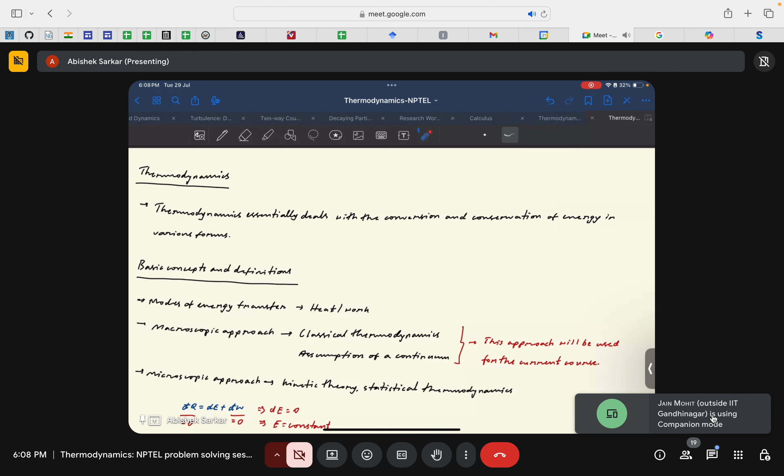Since these energy interactions are something we deal with on a day-to-day basis, from the microscopic level to very large scale interactions, the applicability and relevance of thermodynamics becomes quite immense. This course will help us visualize these kinds of interactions and understand how this energy transfer occurs and why it occurs, in the directionality of these energy interactions, and help us understand how we can quantify it in the best way possible.

If anybody is taking this course for the first time, I'll give a quick note: this course at the very beginning may seem quite uninteresting, because that's what happened to me when I took the course for the first time. But as we see the implications it has in our day-to-day life, we'll appreciate its beauty, and how the scientists who contributed to the development of this course helped us appreciate its beauty and applicability. So with that little bit of motivation, let's start the course.

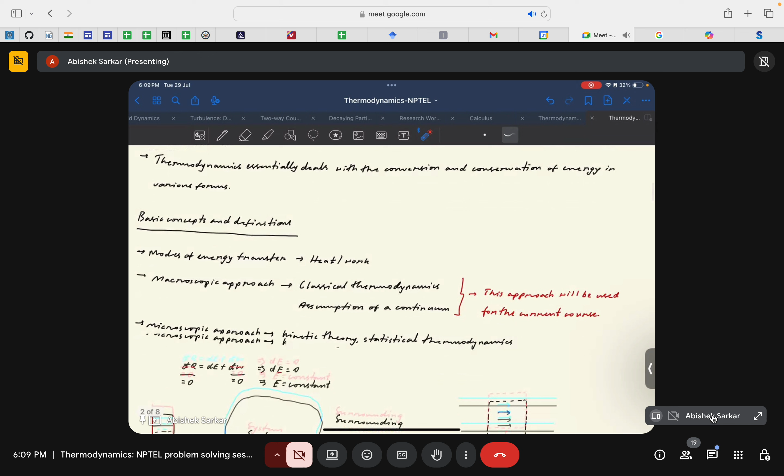As in the lectures, Professor Anand thoroughly covered different concepts and definitions important to start the course. Thermodynamics deals with these modes of energy transfer, and these modes of energy transfer interactions are mainly in the form of heat and work.

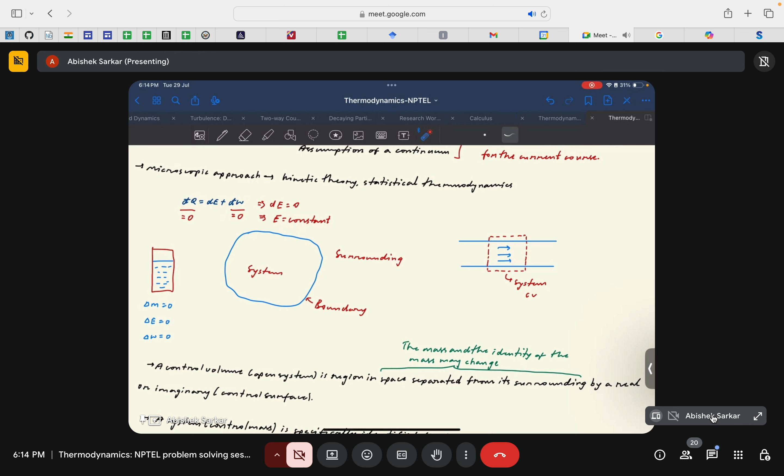You can assume an imaginary boundary in that area. But in all cases other than the top of the cup, the cup essentially acts as a very solid, real boundary to the tea, which is our system. The surrounding is the atmosphere with which the tea interacts for its temperature to go up or down. So depending on the scenario of the atmosphere, for example if the atmosphere is cold, which is generally the case, the temperature of the tea will go down through its interaction with the surrounding.

This concept of system plus surrounding encompasses the universe that we see with our very eyes. So anything that is not the system can be considered to be surrounding.

These are very basic terminologies, and I think it's quite easy to understand right now, but it's very important, at least for the later part of the course, to be able to differentiate between the system and the surrounding. It might be the case that we have focus on, say, two separate cases.

For example, say the cup that I was discussing, let me draw a figure. Say now we have a cup which has divisions. For example, consider a case where one side of the cup has tea in it, and the other side of the cup has, say, coffee. It's just a very vague example.

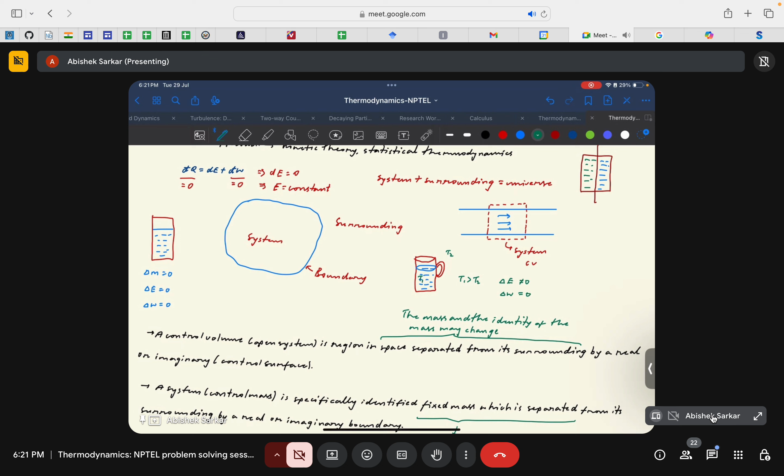There's essentially no work done, because there is no kind of work interaction being done on the tea, so the net work done would be zero. But the interesting thing would be the mass transfer.

For example, if the vapor above the tea, because of it interacting with the atmosphere - say if it was covered initially, using another color - assume the hot tea's vapors go up and condense on this plate, and pour back down on the tea. So the net mass transfer would be zero if it was enclosed.

But if we remove this cap that was covering the tea, then because of these vapors coming out of the boiling tea, there will, even if it's very small, be a certain amount of mass transfer. So delta M is also not equal to 0.

Now let us consider an example used by Professor Anand: tea kept in a thermoflask. A thermoflask is used to preserve the temperature of any liquid kept inside it, for example a hot tea or a cold juice, basically by preventing any kind of heat interaction.

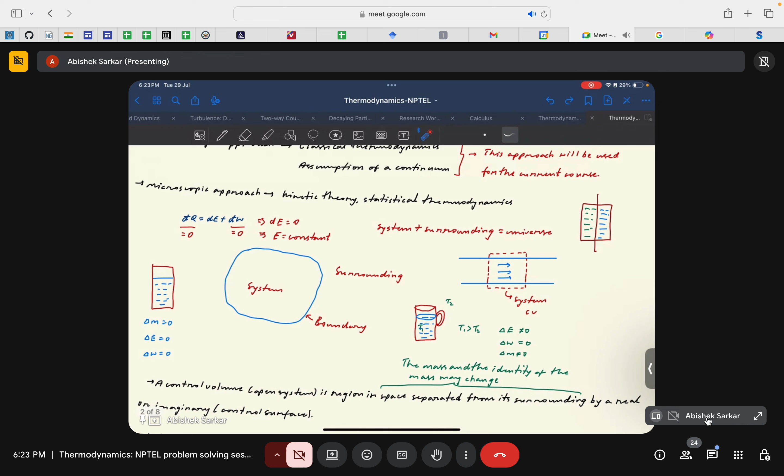Looking at this isolated system from the perspective of the first law of thermodynamics: since the net work interaction is 0, delta W equals 0. There is no heat interaction, so delta Q equals 0. Since both are 0, it implies the net internal energy dE is equal to 0. So the internal energy of an isolated system is constant.

This is one way we can understand the different types of systems: isolated system, open system, and closed system. We will look into it further.

Just don't worry, as I mentioned, we will dive deep into this when we thoroughly discuss the first law of thermodynamics. It's just that since Professor Anand already introduced it in the lectures, I am going through what was discussed there.

With that comes different standard terminologies used to understand system and surroundings, and how we can differentiate them. A control volume is a region in space separated from its surrounding by a real or imaginary boundary.

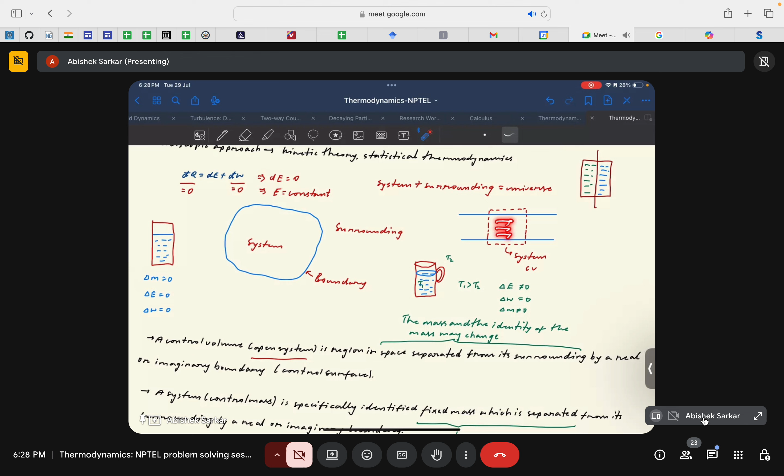These kind of systems are known as control volumes and are often used to analyze open systems. As the term itself tells us, open system would basically imply that there is a net mass interaction or net mass transfer. So delta M will not be equal to 0. In these kind of systems, the mass and the identity of the mass may change with time.

But in the case of a system or a control mass, this has a fixed mass which is separated from the surrounding, and the identity of the mass remains unchanged. So this basically tells us about a closed system.

For example, in the case of this thermoflask, where the system was our hot tea in the thermoflask, you can see that even if there is, say, evaporation and condensation within the thermoflask, the identity of the mass within the control system remains the same. So that's why it essentially represents a closed system.

So a control volume approach is often used to analyze open systems, and this control system or control mass approach is used to analyze closed systems, where the identity and the amount of mass remains constant.

But in the case of control volume, here in this case, if the flow rate, say m dot, or delta m dot is equal to 0, meaning the mass flow rate does not change with time, then we can say that the quantity of mass remains same, but the identity changes because there is a continuous flow of fluid through across the control volume. But if the mass flow rate is not constant, then we can say that along with the identity, the mass of the fluid inside the control volume also changes with time.

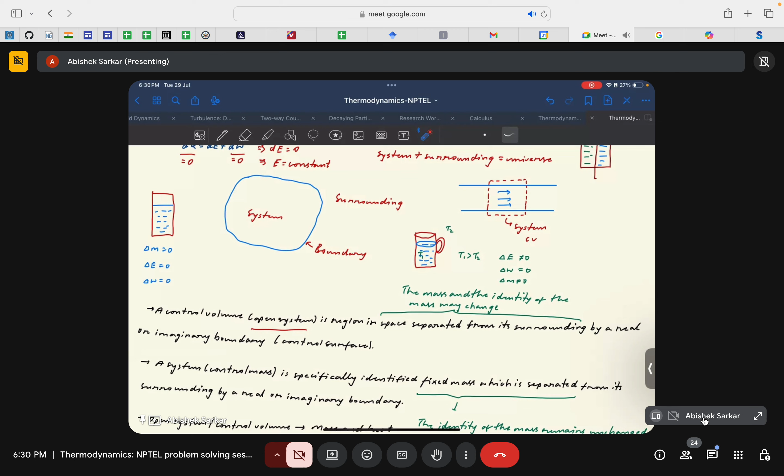As I already mentioned, in the case of open system or control volume approach, there is mass, heat transfer along with work interactions. So delta M and delta E, delta W are not equal to 0. But in the case of a closed system and a control mass, there can only be heat and work interactions. That's why delta M is equal to 0 and the other two may not be equal to 0.

But in the case of isolated systems, that is the case of thermoflask, there is no heat or work interaction or no mass transfer either, so delta M, delta E and delta W all are equal to 0.

I hope this was clear till now. If there is any doubt, you can ask. Okay, it's fine. Okay, so now let us again discuss a bit more on other specific terminologies related to this course.

Okay, so let's start with some thermodynamic properties. A thermodynamic property, or just a property from the perspective of thermodynamics, is a measurable macroscopic characteristic of the system. For example, temperature. In the case of this hot tea, temperature would be the property that we are concerned with. So temperature is a property of the system.

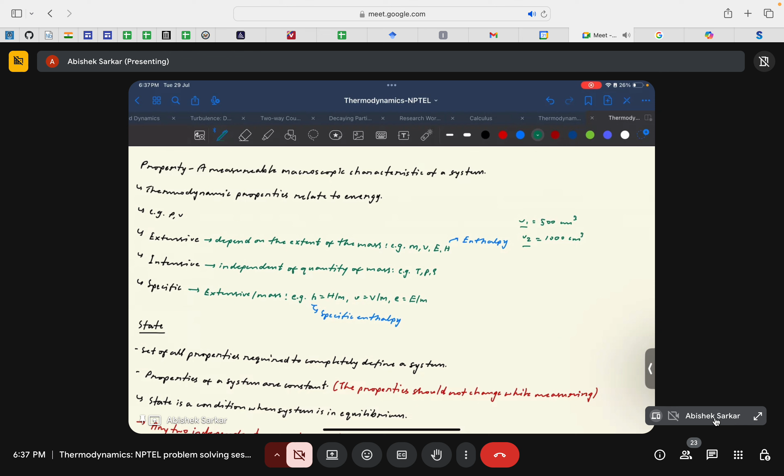Then after some time, when we inflate it using a cycle pump, the volume now becomes say 1000 centimeter cube. So you can clearly see that this volume is now depending on the extent of your cycle tube. When it was deflated, it covered a comparatively lesser area, but after it gets inflated, now it covers more area or has a greater volume. So this depends on the extent of your system.

But now take another case - the intensive properties which are independent of the quantity of mass. Or in other way, since V2 is greater than V1, if the density of air remains constant in that particular flow regime, then you will see that the mass of the air, M2 and M1, M2 is greater than M1.

So it depends, in one way or another, on the extent of the system - this volume. Now, intensive properties are independent of the quantity of mass or the extent of the mass. For example, temperature.

Again, let us take the example of the hot cup of tea - I think I should stick with that so that all these properties can be understood well. There is a certain volume of tea inside the cup. Considering there are no rapid fluctuations in temperature, and small minute changes due to the temperature gradient and proximity of the tea near the surface, we can essentially consider that the temperature of this tea remains uniform.

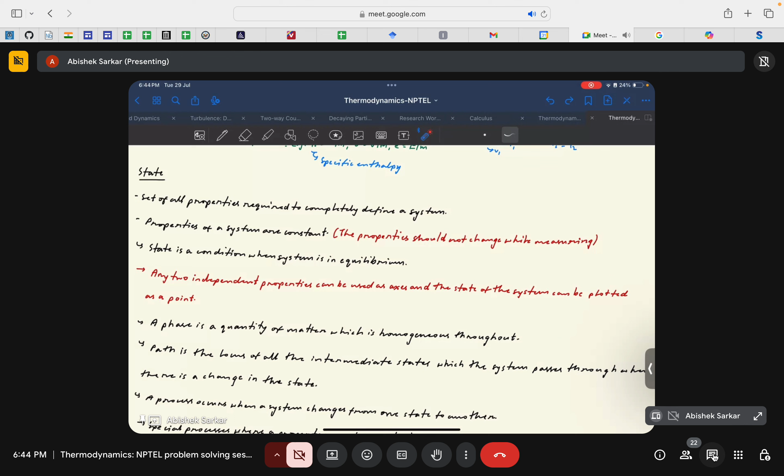Can you ask questions by unmuting? Yeah, please, you can ask. Hello sir, thank you for allowing me to ask the question. Sir, in one of the lectures, Professor Anand said that if we take a system having two parts with one partition in between, one part has absolutely no pressure, and the other part has pressurized air. If we puncture the membrane, or remove the partition suddenly, the gas will expand, right? And the work done by the gas is zero. Is that correct? Yes.

But if we imagine that the boundary of the system is an adiabatic boundary, there is no heat transfer taking place across it, right? So after a certain expansion in that process, if we apply the first law of thermodynamics, delta Q equals delta U plus delta W. So delta Q is zero. After expansion, there will be somewhat of a drop in temperature. Am I right, sir? Yes, if there is a drop in temperature, there will be a non-zero value of change in internal energy. So there has to be a non-zero value of work done also.

So you are saying that in the case of free expansion, there has to be a non-zero work done, right? Yes, sir, in that case. Yes, sir.

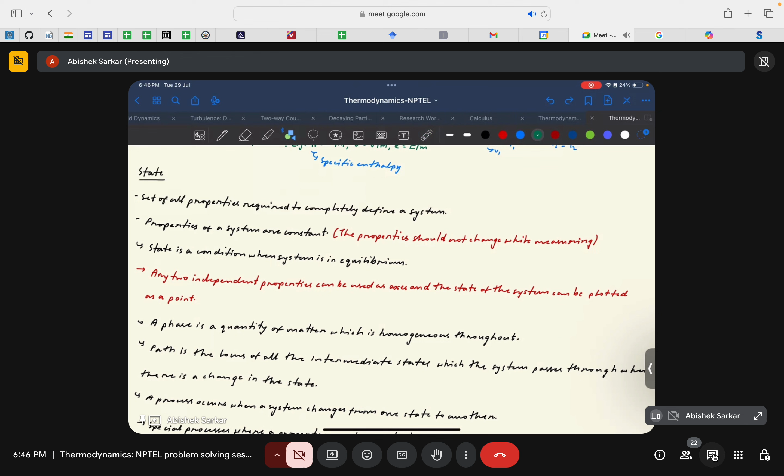So if we take the boundary as insulated, insulate the entire system, and allow free expansion, and apply the first law of thermodynamics where delta Q is zero as the system is insulated, due to the expansion there is a drop in temperature, so there is a change in internal energy, and due to the expansion there is a change in pressure also, so there has to be some work done. Now it is true that there is no restrictive force for the expansion, but if we go by the theoretical way, following the first law of thermodynamics, delta Q equals delta U plus delta W, so delta Q is zero and delta U has a non-zero value, so delta W must have some non-zero value.

Okay, that's perfect, sir. I'm just trying to understand the question, it's nice. So I'm just trying to see whether I can look into it in this session. Otherwise, if you join the next session, I can try to answer that. But let us just try to look into it. What you are trying to mention...

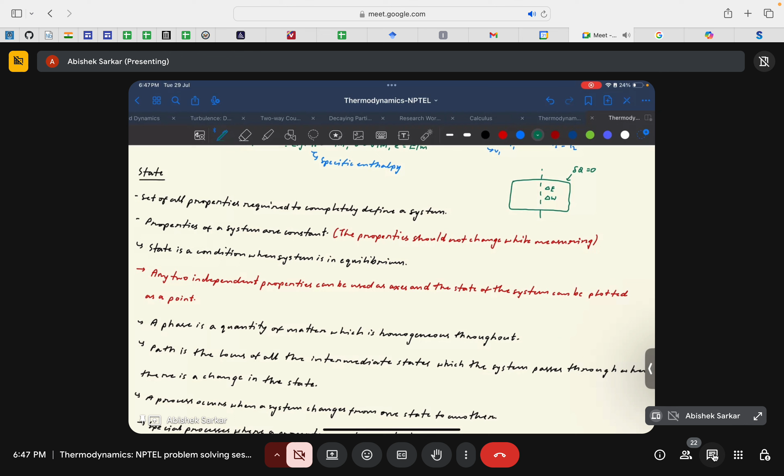...is equal to zero, and you are saying because of the free expansion, because of this gas expanding, there has to be a change in internal energy and work done. Right. If you write down the statement for the first law of thermodynamics...

Now in this case, delta Q is zero, right? Now as the gas is expanding, there is a drop in temperature. So if there is a drop in temperature, the internal energy will change, delta E will change. So if there is a non-zero value of delta E, there has to be a non-zero value of delta W also. So following this equation, delta W is not zero, whereas we have seen that in case of free expansion, work done is zero.

Yes. If I'm wrong, please let me know. No, no, it's absolutely fine, it's a nice way to look into it. I'm just trying to see whether I can answer it right away or not. So, yeah, the thing is that...

Change in the internal energy has to be balanced out with some work. But I'm just concerned whether this work is entirely, as you mentioned, because of free expansion, or there is some other kind of work that has to be generated from the system. That's the case.

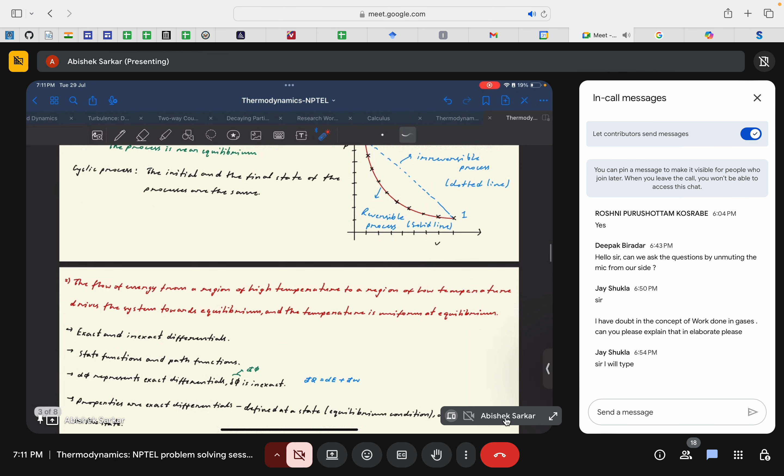The state functions represent exact differentials, and path functions represent inexact differentials. There are different ways to represent them from the perspective of thermodynamics.

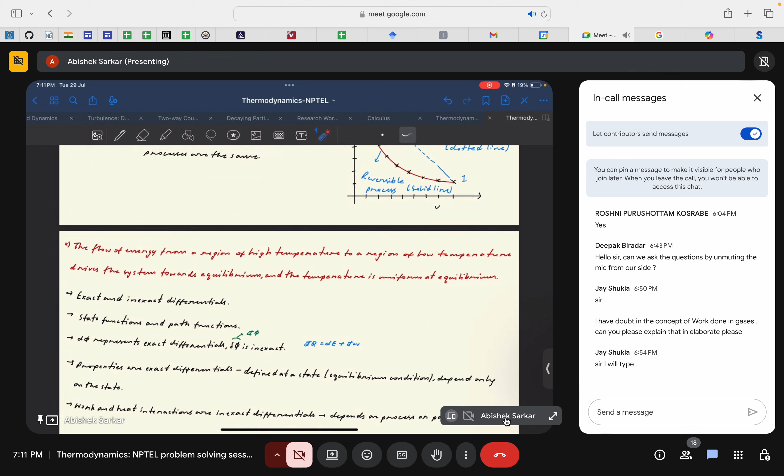For example, in the case of the first law, as written here, there is distinctly a cut on the differential operator on the heat and work interactions, and no cut on the differential operator on the internal energy. This states that heat and work interactions are inexact differentials or path functions, and internal energy is a complete or exact differential, and is indeed a state function - independent of the path followed to achieve the change in state of the system.

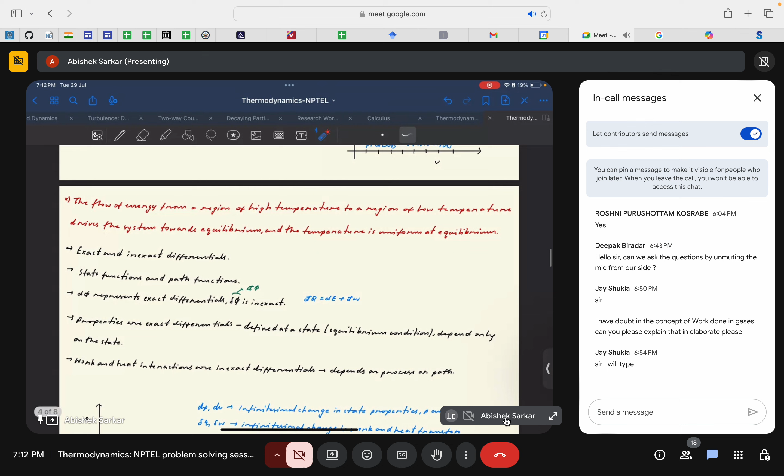So from now on, when representing any small change in exact differentials or state properties - for example internal energy, pressure and volume - we will use the simple differential operator dP and dV. But for path functions such as work and heat interactions, we will use this delta operator, or d-cut. This is just notation, but it's important to know the difference.

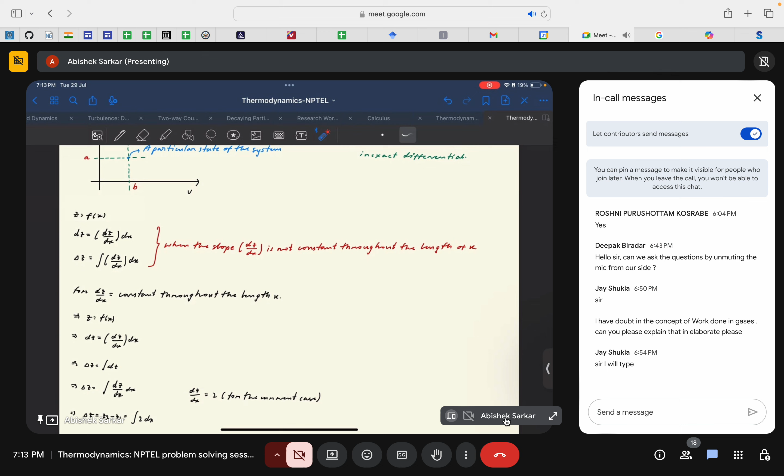There was an extensive discussion on how Professor Anand used some mathematics to look into this, to differentiate these different kinds of functions - state functions and path functions. Let us look into how to distinguish them.

Consider a property z, which is a function of x and y. Then a complete differential of z, dz, can be represented as (dou z / dou x) times dx, where dou z by dou x means the partial differentiation of z with respect to x, plus (dou z / dou y) times dy. This is a standard mathematical definition to represent a complete differential.

If z is a state function, complete differential, or exact differential, then dou by dou y of (dou z by dou x) would be equal to dou by dou x of (dou z by dou y). This is what is shown here.

So let us represent dou z by dou x as m, and dou z by dou y as n, then dz is represented as m dx plus n dy - simple mathematical steps, not too complicated. Then dou m by dou y equals dou square z by dou y dou x, and dou n by dou x equals dou square z by dou x dou y. If dou m by dou y equals dou n by dou x, then it represents an exact differential. This is the mathematical way to classify the path independence of different properties.

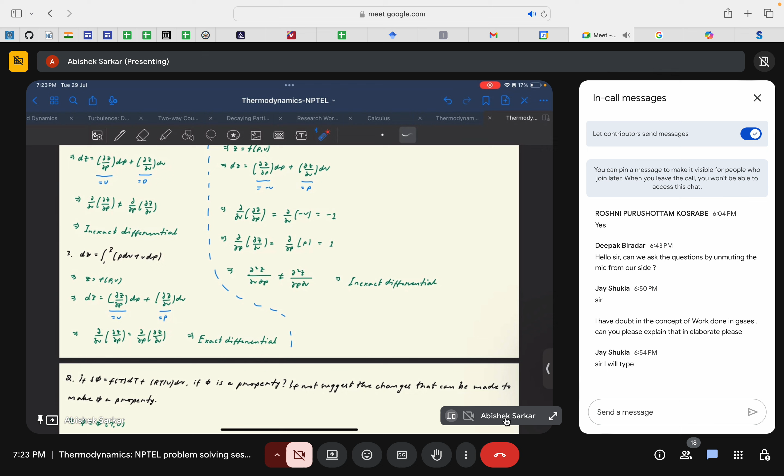So did no one get the answer? Deepak, are you in the class? Yes sir, I'm in the class, but couldn't solve it. Okay, sure.

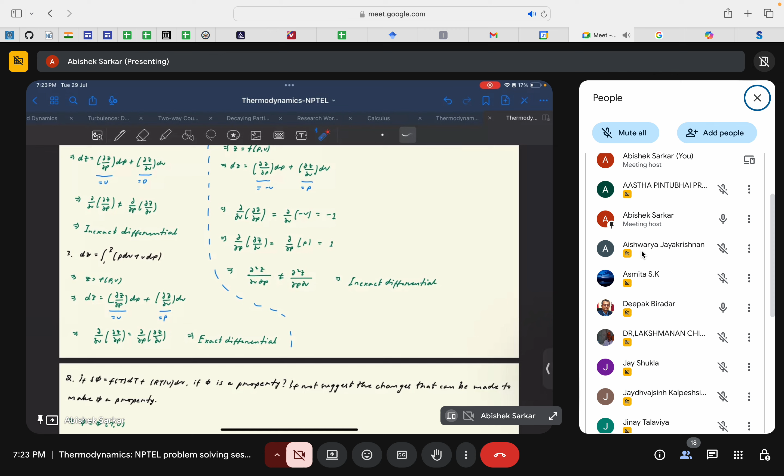So let's look into it. I think it's quite simple. Let us consider, let us start with the same differential understanding. Phi is a function of temperature and volume, because the only independent properties that we have in this case are temperature and volume, so we can essentially write phi as a function of T and V. Then d phi is dou phi by dou t dt plus dou phi by dou v dv. I hope it is clear till now.

If we compare the coefficients of this ft and this, then dou phi by dou t is a function of temperature T, and dou phi by dou v is RT by V. Then you can see that dou phi by dou t is only a function of temperature here. So if we have dou by dou v of some function of temperature, dou by dou v is partial differentiation of a function with respect to v.

Since this is only a function of temperature, dou by dou v of f of t is 0. Similarly, dou by dou t of RT by V is equal to R by V. Since these two are not equal, we can essentially say that phi is not a property. Okay, that's the first part of the question.

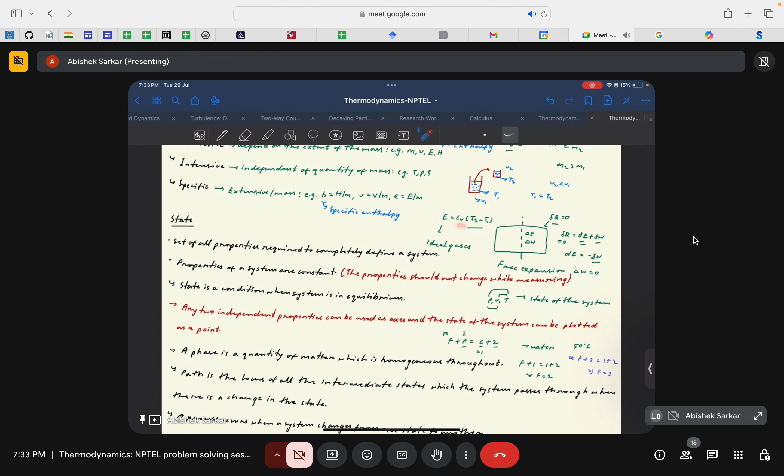All right, yeah, that's the way. If you just look into this definition itself, the temperature won't change because internal energy is remaining constant, right? So if this is constant, then T1 and T2 has to remain constant. Cv is essentially a constant, so T1 and T2 has to remain constant to preserve the first law of thermodynamics, right?

But the thing is, if at all we come to Joule expansion and understand Joule expansion and Joule expansion coefficients for different real gases, then we will understand how this temperature change is compensated in the system, even in the case of free expansion. Did you mention the Joule-Thomson coefficient? No, Joule expansion, I'm just saying Joule expansion. When we look into it, we will discuss that, right?

Okay, yeah, fine. But sir, I still think that for this general gas, even for the ideal gas, the temperature has to drop down. If we take down the general gas equation, that is PV by T is equal to constant, and apply it for P1V1 by T1 is equal to P2V2 by T2.

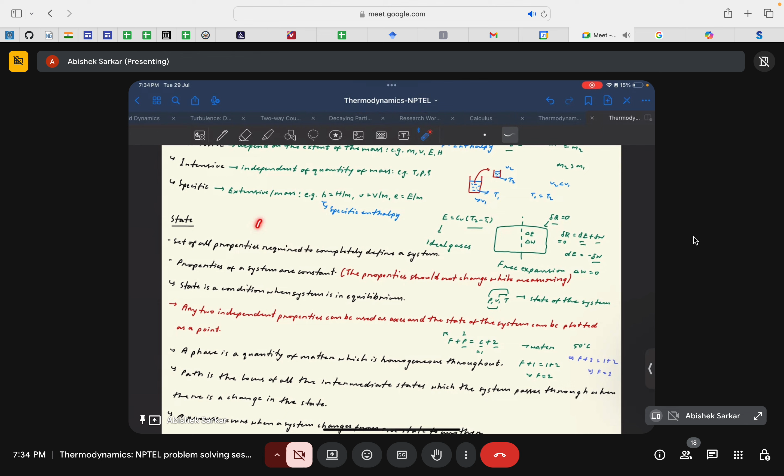So even in that case, what did you mention? Can you just tell again? That is P1 V1 by T1 is equal to P2 V2 by T2. Let me just write it. P1 V1 by T1 is equal to P2 V2 by T2.

Okay, so that's the general gas equation, PV is equal to nRT. So even in this, if you look at simple examples of pressure and volume, volume is increasing, pressure is dropping down, there is somewhat expansion. So there is somewhat loss of pressure energy also. So where does that pressure energy go then?

So if you follow this equation, P1 V1 by T1 is equal to P2 V2 by T2, and if you are saying T1 is equal to T2, it will become P1 V1 is equal to P2 V2. So it will appear like it is isothermal expansion. Am I right, sir?

Okay, now if you try to draw that process on a PV diagram, it will give a rectangular hyperbola, right? And if you look at the area under that curvature, it's a non-zero area. So it means there is somewhat work done.

Yeah, but the thing is, we need to also impose the adiabatic condition as well. So the role of adiabatic is that it is simply delta Q is equal to 0. So that we already taken into account.

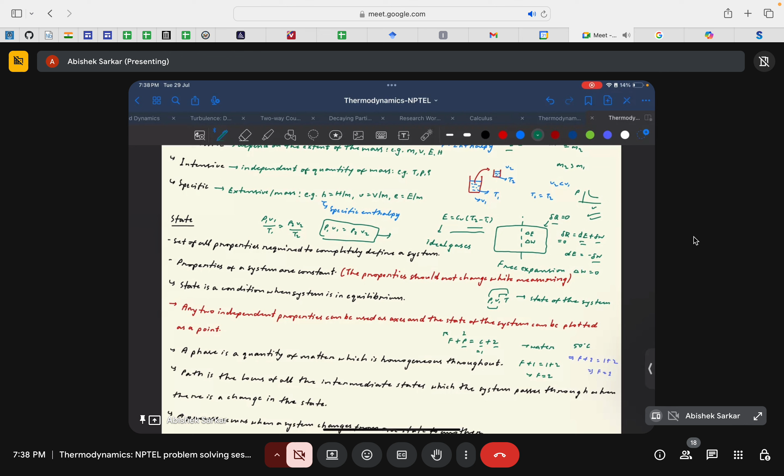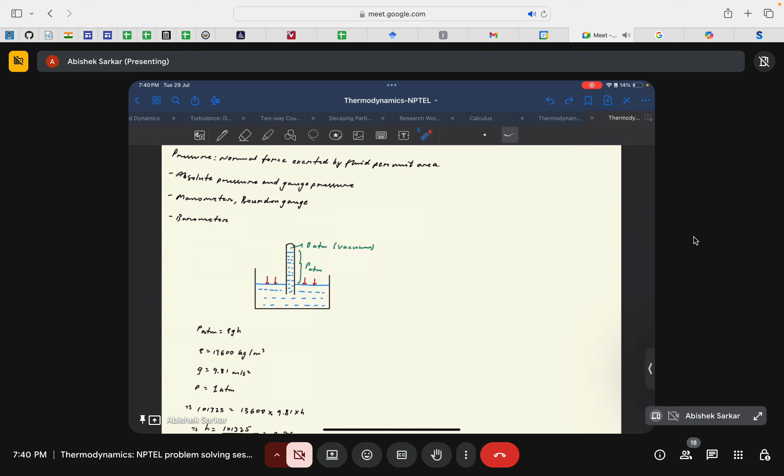Pressure, by definition, is the normal force exerted by the fluid per unit area. If you want to go deep into this, there is a very thorough discussion in the fluid mechanics perspective, but for thermodynamics and a basic topic discussion, we don't need to go beyond that. Then there's a concept of absolute pressure and gauge pressure. Absolute pressure is basically atmospheric pressure plus gauge pressure, or P absolute equals P atmospheric plus P gauge. There are different devices used to measure these pressures.

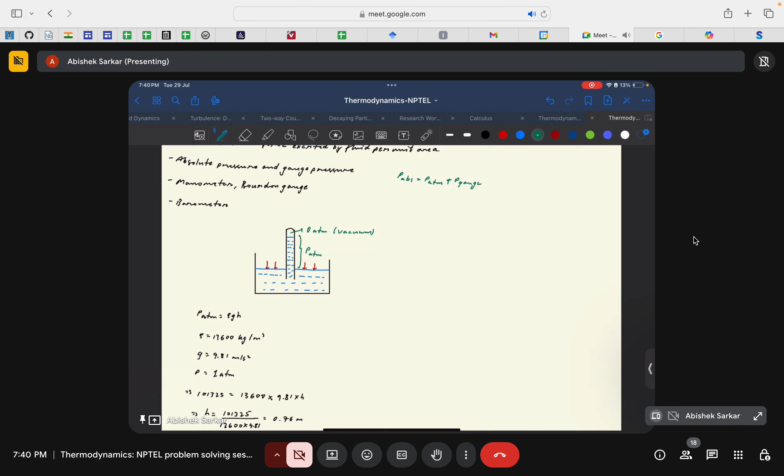These devices include the manometer, Bourdon gauge, and barometer, and the device we are concerned with in today's discussion is the manometer.

Let us take this example: a simple piezometer or barometer, used to measure atmospheric pressure. Consider an inverted tube inserted in a liquid, where the pressure exerted on the surface of the liquid is atmospheric pressure. Because of this pressure, the liquid level rises inside the tube. For simple understanding, if you push the liquid from the surface, since it has nowhere else to go, it will try to go inside the tube, rising to a certain height and then achieving a constant value. Given that the pressure inside this tube is vacuum or zero, the height of the liquid that rises inside the tube gives us a quantifiable way to measure atmospheric pressure.

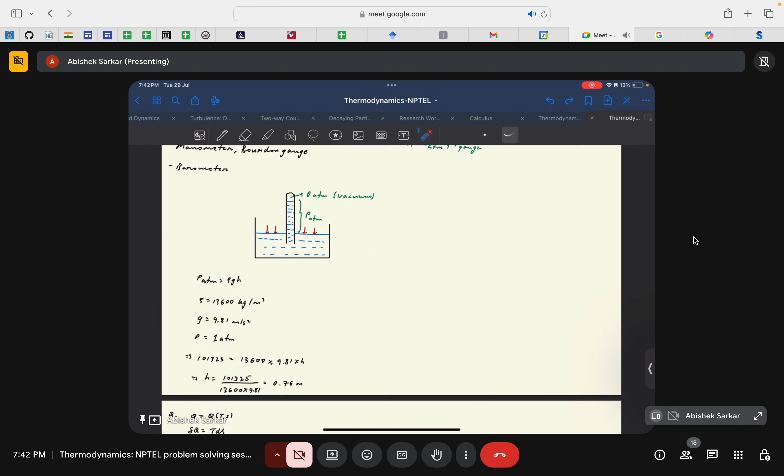So in the case of this barometer, P atmospheric equals rho g h, where h is the height of the liquid inside the barometer or tube. For example, if this fluid is mercury - it can be water or anything you want, but mercury specifically, since the density of mercury is very high, the height of the liquid that rises inside the tube is considerably small and measurable.

For example, if you use a lower density liquid, say water or air, then the height the liquid rises would be very huge and very difficult to be measured. That's why a very dense liquid is used to measure atmospheric pressure. So this simple equation, P atmospheric equals rho g h, comes from the hydrostatic law, but I don't think I need to go into where this equation comes from.

Rho is 13,600 for mercury, g is 9.81, and we need to find h, knowing atmospheric pressure is 101,325 pascals, where pascal is the unit of measuring pressure. Then h is given by 101,325 divided by 13,600 divided by 9.81, where g is 9.81, the acceleration due to gravity. Then h turns out to be 0.76 meter. This h is basically termed the barometric height, or the height of the mercury column in a piezometer that represents the atmospheric pressure.

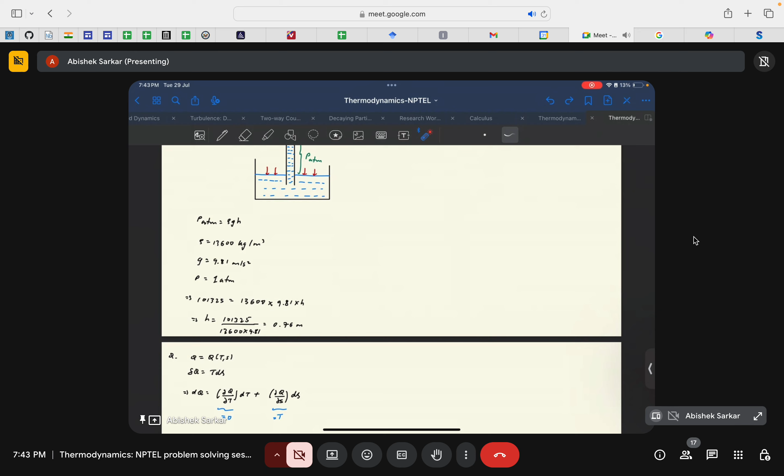These manometers, even in thermodynamics, we won't use this much, but in fluid mechanics it's a very basic or staple problem where manometers are used to measure pressure. So if you are interested in fluid mechanics, or you are going to take a fluid mechanics course, I think this will come in handy.

So I will just describe how to measure pressure using a manometer in this particular example, and after that all of you will be very well versed in dealing with this kind of problems.